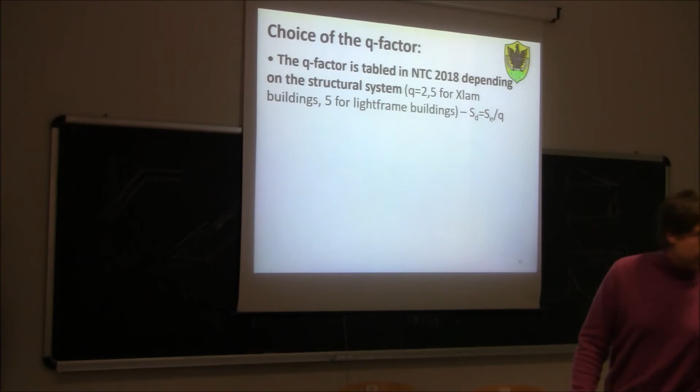Last time we discussed the choice of the behavior factor for timber structures, and we said that for cross-laminated buildings, basically, let me just show this.

This is the table we can take from our Italian regulation to choose the behavior factors. We have to distinguish between high ductility and medium ductility. For the most important systems, like light frame construction, we have a value ranging from 3 for ductility class medium to 5 for ductility class high. For cross-laminated timber buildings, our Italian regulation provides only one value, 2.5, for the ductility class medium.

We also said that, strictly speaking, if we have a type of cross-lam building characterized by short walls with vertical joints, then based on tests carried out in Japan by Italian researcher Professor Ceccotti, we can use a Q factor of 3. If instead we have walls without these vertical joints, so a panel as long as the whole wall, in this case we should use a behavior factor of 2.

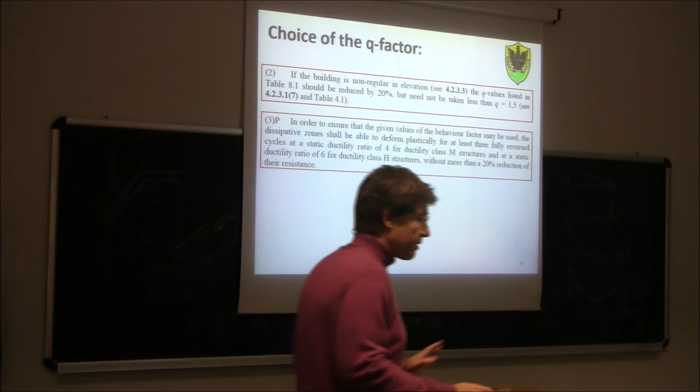So what does this paragraph mean? It means basically that first of all we should be able to identify the dissipative zones. This is the most important thing. When you are designing your reinforced concrete frame, the first important thing is to understand what are the dissipative zones. So first we have to decide or define what the dissipative zones are.

And then theoretically we should perform some tests, some cyclic tests. And a fully reversed cyclic test, what does it mean? For example, if I define...

If I have a wall, and if I define that the connection of this wall to the foundation is a dissipative connection, what I should be doing is basically apply a load, for example with a jack here. So with a jack, I should move the free end of this wall in one direction, then in the other direction. I should move it according to a certain loading protocol, which means that...

So suppose that this is U, the horizontal displacement. There is a regulation saying that when we want to test for cyclic resistance of this dissipative connection, we should move forth and back this free end from a certain quantity. For example, this is the imposed displacement by pulling and pushing the free end of this wall using a jack.

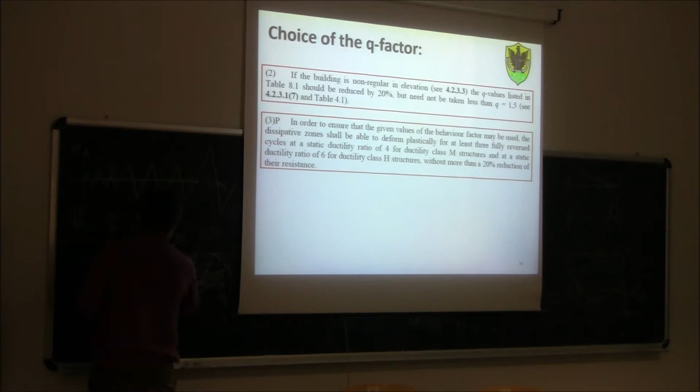And if I have a mid-ductility class, in this decrease you see there is a decrease here, delta F in some way. I get to a certain point where I have a decrease, delta F, like a kind of softening. This decrease should not be more than 20%. So delta F over F max should be less than 20%, where F max is the maximum force.

For a ductility ratio of 4 for medium ductility class, or 6 for high ductility structure.

So if this is F and U, and this dashed line is the envelope of this cyclic test, I will then have to find out an equivalent kind of elastoplastic relationship, which is actually, to be honest, not equivalent, it's more a kind of bilinear relationship, something like this. This is the conventional yielding point.

And when I get to a point where I have a decrease, so F max, this is delta F, delta F equal 20% of F max, here I identify this is U-Y, this is U-ultimate. So mu, the ductility ratio, is U-ultimate divided by U-Y. This shall be greater than or equal to 4 for ductility class M, and 6 for ductility class H.

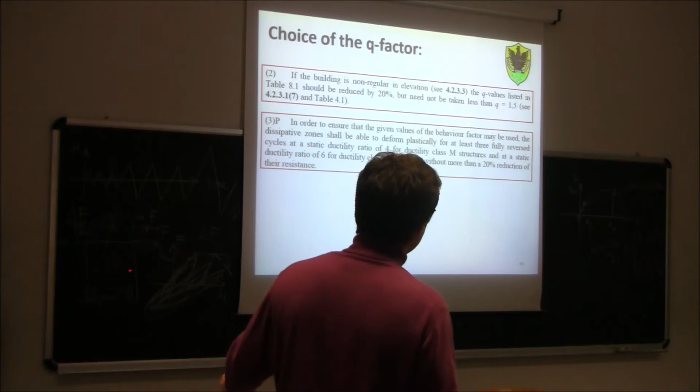Now let's try to repeat shortly again. We said that the regulation said we can use the upper limit of the behavior factor given in the table when I have performed fully reverse cyclic loading tests on the dissipative zones. These fully reverse cyclic loadings are characterized by 3 cycles in one direction, 3 in the other, with increasing amplitude, as you can see here.

Once I've done this cycle, I'm going to approximate and find what is called the first backbone curve, curva inviluppo. This first backbone curve is the envelope of the peaks of these cycles. And then I'm going to approximate this first backbone curve with a bilinear curve.

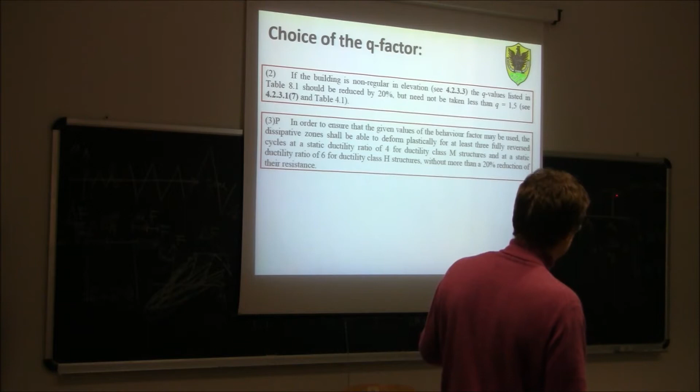So this is a bilinear curve, passing through a conventional yielding point here. On this equivalent bilinear line, I'm going to stop where I have a decrease of the peak force, F max, equal to 20%. So I'm going to define this as the ultimate point of my structure. This is the conventional yielding point, and this is the conventional collapse point.

I measure the two values of displacement, Uy and Uu. Uy is the displacement associated to the conventional yielding point, and Uu is the displacement associated with the conventional collapse point. Then I do the ratio, which will provide me what we define as the ductility ratio.

The ductility ratio shall be not less than 4 for ductility class medium, and not less than 6 for ductility class high.

So only if I comply with this relationship can I use the upper values, these values coming from this table, because those are upper values of the Q factor.

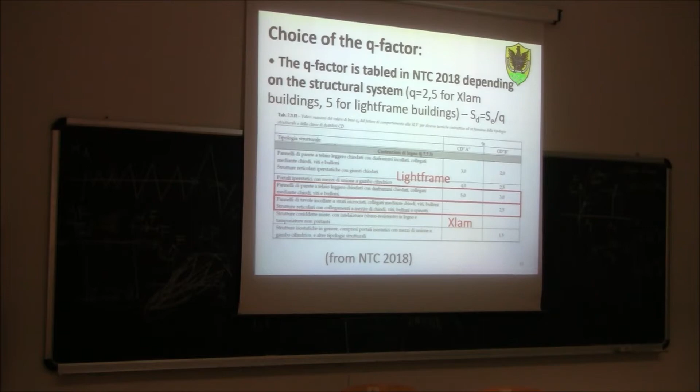Now, in order to understand how to do it—because of course when we design a structure we can't every time do experimental tests—we need to find a simplified way to solve the problem. The first important thing is to understand what are the dissipative zones for the different structural systems.

So to understand what are the dissipative zones for cross-lam, we can have a look at this video, which depicts one of the tests carried out in Japan on this 3-story cross-laminated timber building by Professor Ceccotti. This is a shaking table test.

As you can see here, the base can be moved all around with all degrees of freedom in space, with the acceleration you want. In this case, they built this building out of cross-lam, and then they subjected it to an acceleration recorded during past earthquakes.

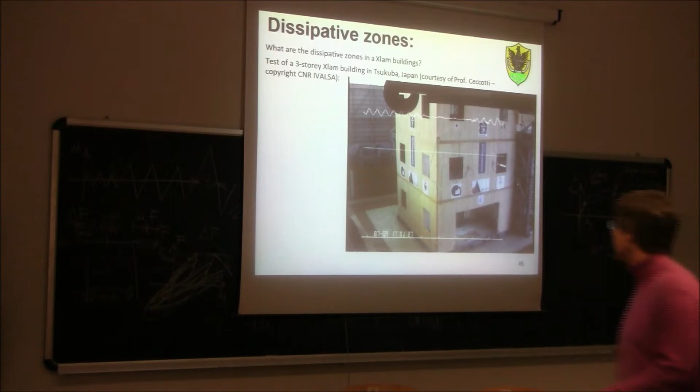Now let's have a look at the video and try to understand what kind of dissipative behavior we can see.

Okay, let's try again. Let's look at the wall. This building is made from different panels, short panels, and during the earthquake, as you can see, there is a very clear dissipative behavior.

If you want a very clear displacement, look at this wall and look how it rocks on one side and the other. So in the end, the idea is that in a building like this, the dissipative behavior is rocking.

So if this is a wall made by two panels joined along the vertical side and connected to the floor with some hold-downs and brackets, the kind of behavior that should occur during an earthquake, in order to dissipate energy, is the one you can see right now.

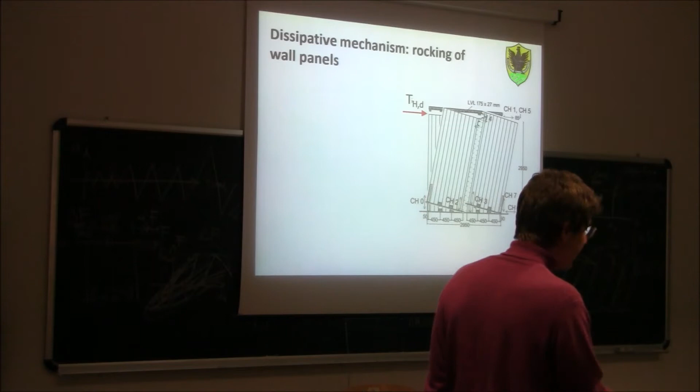Now, the hold-down is made of a piece of steel, a bolt here, the foundation, and a nail connection between the hold-down and the wall. Which one of those three connections should be able to plasticize? All three, or is it better one or the other? So there is a bolt here, then the plate, and then this nail connection between the plate and the timber.

Same problem with the plate. The plate could also plasticize in tension, but then, of course, the hold-down wouldn't be able to bring the wall back to the initial condition because it would be this kind of plasticization. Anyway, there would be a risk of brittle failure because this plate is subjected to tension.

So what should really, the only thing that should plasticize here, is the nail connection between the plate and the wall itself. This nail connection between the hold-down and the wall should be able to plasticize. And if you remember, this nail connection is characterized by a ductile failure only if the nail itself is plasticized.

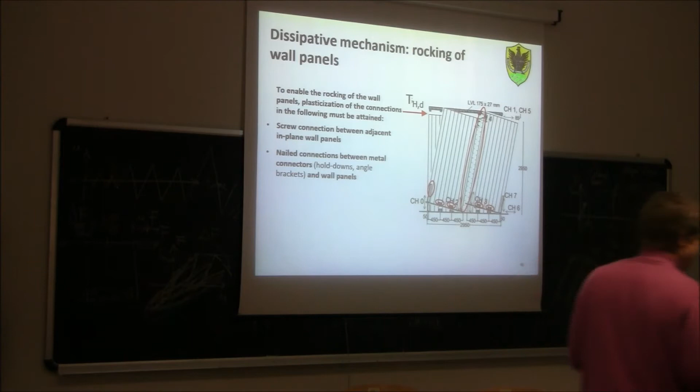We need to make sure that the failure mode of this steel-to-timber connection is characterized by the formation of 1 or 2 plastic hinges into the nails. It's not enough that this plasticizes. In order to make this happen, we need to ensure that among the different failure mechanisms for a steel-to-timber nail connection, we have one characterized by at least the formation of 1 or 2 plastic hinges into the nail.

Same thing on the angle brackets. Also, the angle brackets should be able to plasticize, because otherwise, if this connection does not plasticize, it cannot allow for this uplifting of the wall itself. So all these nail connections between steel plates and timber should be able to plasticize, plus this screw connection here between the two walls.

So again, if this is a better view of the hold-down construction, this in red, this nail steel-to-timber nail connection should be able to plasticize. This screw connection between adjacent wall panels should be able to plasticize. And this nail connection between the steel angle brackets and the wall should be able to plasticize.

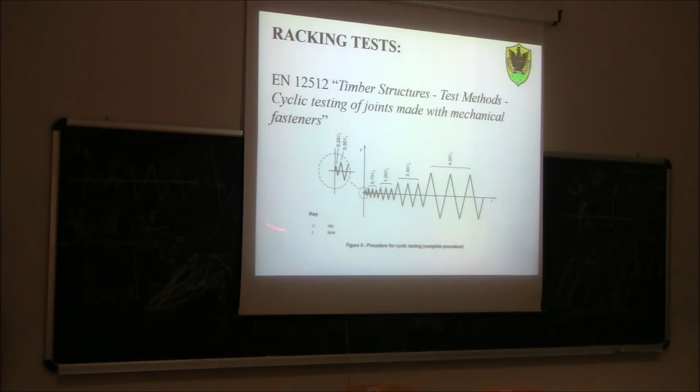Now we go back to this regulation that we were discussing before. There is a special regulation dealing with cyclic tests of dissipative connections, EN 12512, entitled Timber Structures Test Methods, Cyclic Testing of Joints Made with Mechanical Fasteners.

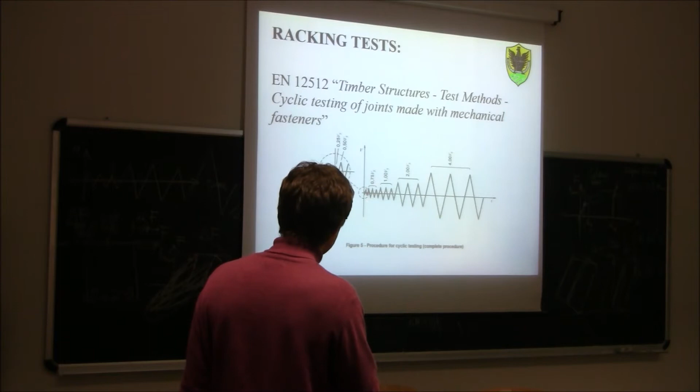Now you can see better what I was meaning before. So this is V, well V is what I call U actually, it's another symbol. The idea, as you can see here, is we have to do 3 fully reversed cycles, then increase until we get to failure. This is the procedure, a typical example. This is a test carried out on the screw connection between 2 adjacent panels.

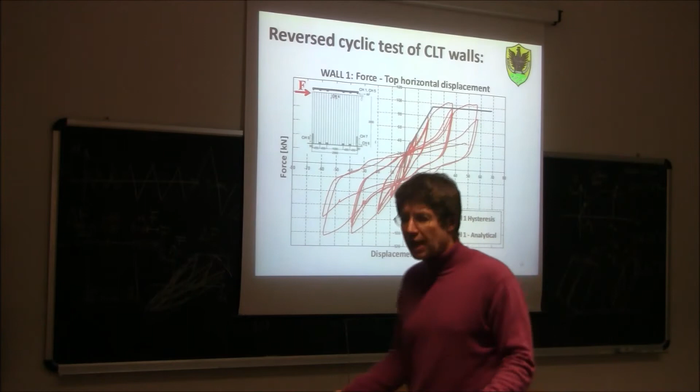So the larger the area, the greater the dissipated energy, and the greater the value of the behavior factor. So if we have a structure which is going to dissipate a lot of energy, this structure will be characterized by fat loops like this, and then we will be able to use a higher value of the behavior factor.

Instead, if we have a structure characterized by hysteretic loops like this, in this case the loops are very slim, so the area within the loops is very small, and so will be the behavior factor. So in a structure like this, the behavior factor will be very low.

Instead, if we have lots of dissipated energy like here, we can use a higher value of the behavior factor. So from our point of view, if we want to perform a better seismic design, we are looking for behavior like this, not behavior like this.

So it's interesting to notice that despite the fact that, if you remember, wood itself is not a very ductile material. If you do a test on the wood itself, like a bending test on the wood, you will get something like this. You wouldn't get any energy dissipation.

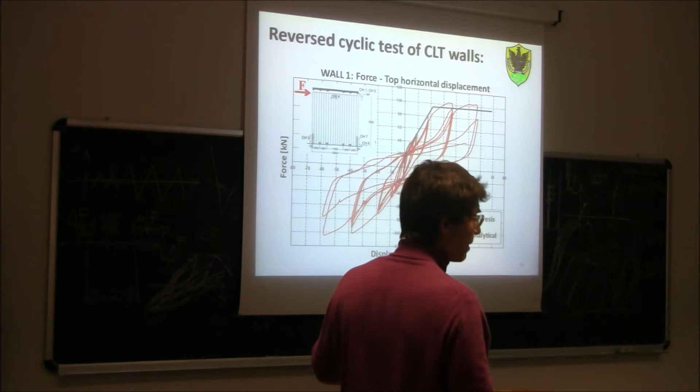If this nail connection is characterized by the formation of one or two plastic hinges, not pure embedding, then with this kind of behavior with one or more plastic hinges in the nail, you can get in the end a fairly highly dissipative structure with a fat hysteretic loop, so a significant amount of dissipated energy. Then I can use a behavior factor which is not very low. For example, for Xlam I can use a behavior factor of 2.5 or 3.

So we can conclude Xlam wall panels can dissipate energy and behave in a ductile manner if the connections plasticize. The panel itself does not contribute to the energy dissipated shown by the failure. In other words, if I do the same test on a cross-lam panel glued to the foundation, I will get something like this. So everything is related not to the cross-lam panel itself, but rather to the connection itself.

There is a significant strength degradation from the first to the second cycle, reduced strength degradation from the second to the third cycle, and remarkable strength increase after yielding. So after yielding you see a significant increase in strength. It's what we call overstrength, which we have to discuss today.

If you remember, for reticular systems you also had overstrength, but as we said last time, while for reticular systems the overstrength factor was, as some of you told me, 1.2 or 1.25, here instead the overstrength factor will be much higher, around 1.6.

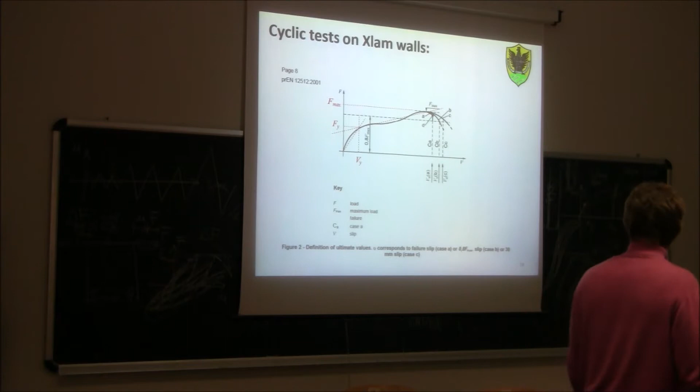So we do this pure conventional construction, get the yielding point, and then we need to define the ultimate point. How can we define the ultimate point? The ultimate point is a value that can be determined by three criteria, not just one. Before I was talking about 20% just for simplification, but actually there are three criteria for determining the actual failure point.

What could be the actual failure point? For example, you are testing the wall. At a certain point, you get a failure of the hold-down. If the hold-down fails into two pieces, you get to this point, and then the curve goes down vertically here — so you get basically a failure here. Or you can have a reduction of the backbone by 20%. Or, if the displacement becomes too big, for example 30 millimeters, then we should basically stop the test. So we have these three criteria.

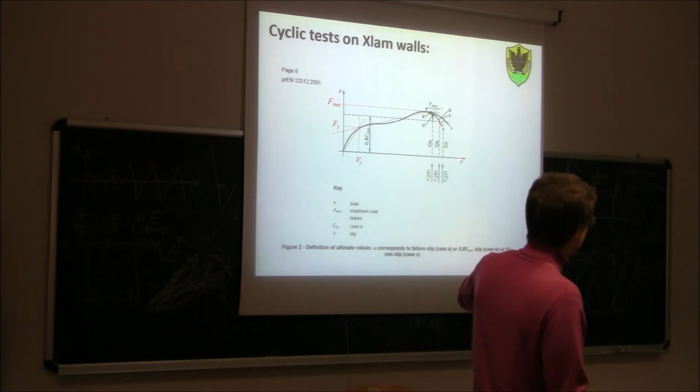The failure is defined by whichever criterion occurs first. This is just a conventional way to define the ultimate displacement. Why do we need the ultimate displacement? Why do we need the yield displacement? Because you need to be able to calculate this ductility ratio.

Remember for steel, we calculated in reinforced concrete the ductility, the curvature ductility ratio for the reinforced concrete section. So we have to calculate the curvature at ultimate and at the yielding point. In that case they were easier to assess. In this case, we need to calculate the yielding point and the ultimate point in a conventional way, and then calculate the ductility ratio between the ultimate value and the yielding displacement.

If μ is greater than 4, we have a medium ductility class, DCB, according to NTC 2018. If μ is greater than 6, we have a high ductility class, DCA, according to NTC 2018. So to understand where we are, if we have ductility class medium or high, we need to perform those tests on the dissipative connections.

For X-lam construction, we found what are the dissipative connections. Now the question is, what are the dissipative zones for light frame construction? For light frame construction, only the sheathing-to-frame nail connections on the perimeter are regarded as dissipative zones.

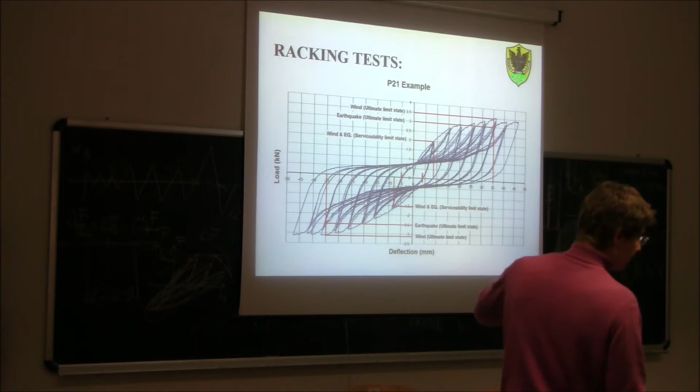Again, if we do a cyclic test on a wall like before, where we make sure that only the nail connection on the perimeter of the wall dissipates energy, we will find this kind of hysteresis loop. Those loops look, as you can see, quite fat, meaning that the structure is able to dissipate energy, and that we can use a significant value of the behavior factor.

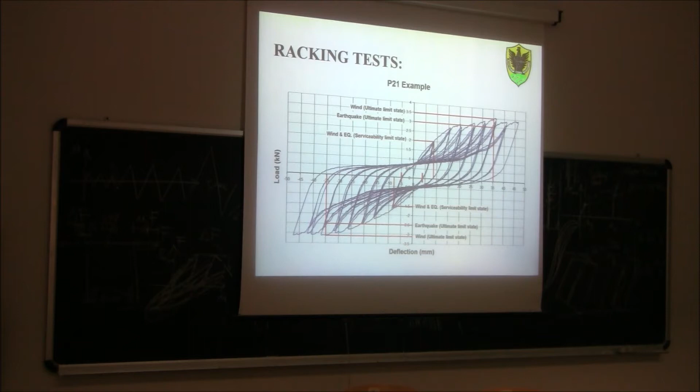Basically the idea is that we should have this kind of behavior: only the dissipative connection on the perimeter of the sheathing should plasticize. Everything else should remain elastic. If this is the case, we can get a good dissipative behavior.

According to Eurocode 8 and the Italian regulation, a Q factor of 5 may be assumed. Note that some other regulations, like the New Zealand standard, and also the new Eurocode 8 that will be issued later, will reduce this value from 5 to 4, because 5 was found to be a bit too high. For the time being you can use 5, but be aware this will be reduced to 4. In my opinion, since 5 is the upper limit, the maximum, it wouldn't be a bad idea to design the structure using 4 instead of 5.

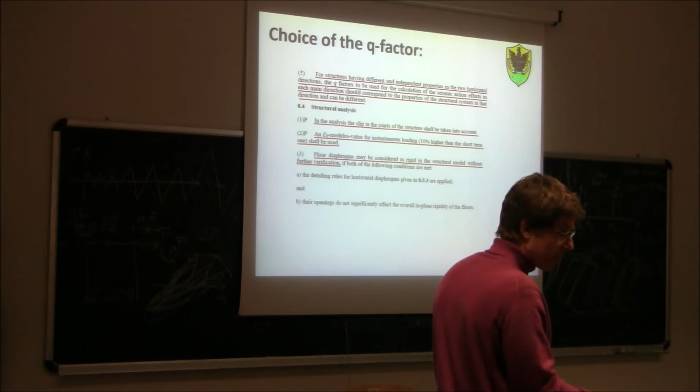If your structure is regular in elevation, you can use equivalent static analysis. If it's not regular in elevation, you use dynamic analysis. In this course we are just going to use equivalent static analysis, the one that you saw with Dr. Somenta and also with Professor Vitali. So we will assume that our building is regular.

Your building may be made of different lateral load resisting systems in the two directions, like in the case of reinforced concrete, where you could have walls in one direction and frames in the other. If the building is regular, you can reduce your seismic analysis to two plane analyses, one in each direction, using different factors. You don't need to use spatial analysis. Same thing we will do in this course, assuming the behavior factor is the same in both directions, or anywhere we could consider it as a plane structure in terms of multi-story building.

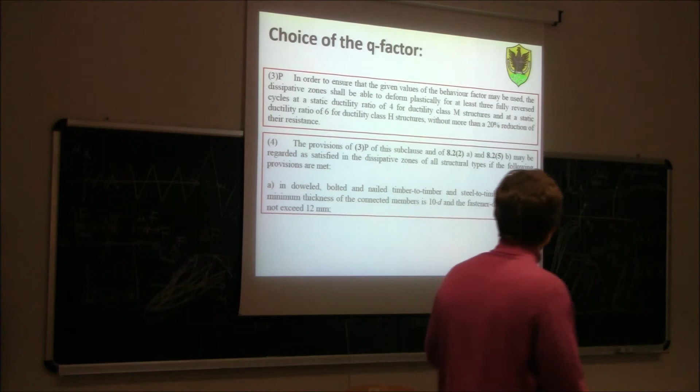So now, if you remember, we said we have a table with the values of the behavior factors. Those behavior factors are the upper limit. If we want to use the upper limit for a high ductility structure, we need to make sure that the ductility of the structure is at least 6.

If we want to use the upper limit of the behaviour factor for a medium ductile structure, we need to make sure that the ductility factor is at least 4. The problem is that when we design, we cannot check the ductility of 4 or 6 by doing tests. So the regulation provides some clauses that are simpler to apply at the design stage.

The regulation says these provisions may be regarded as satisfying the dissipative zone or structure type if the following provisions are met: in doweled, bolted and nailed timber-to-timber and steel-to-timber joints, the minimum thickness of the connected member is 10D, and the fastener diameter D does not exceed 12 mm.

What does it mean? If our dissipative zone is made in this way, with a doweled connection between two timber members and another timber member, and we define T as the thickness of the minimum timber member and D as the diameter of the fastener, then in order to use the higher value of the behavior factor, we need T, the minimum thickness of the timber member, to be greater than or equal to 10 times the diameter of the fastener, and the diameter of the fastener must not exceed 12 mm.

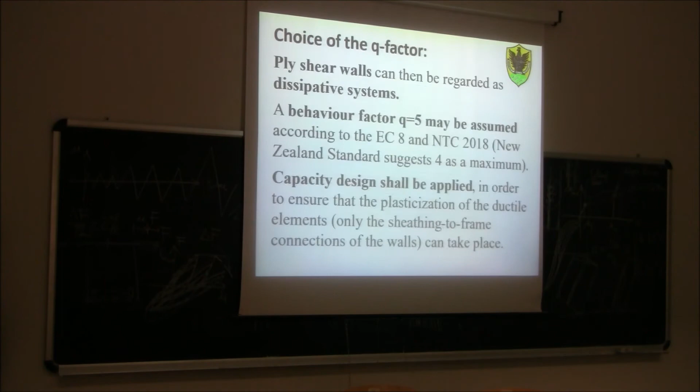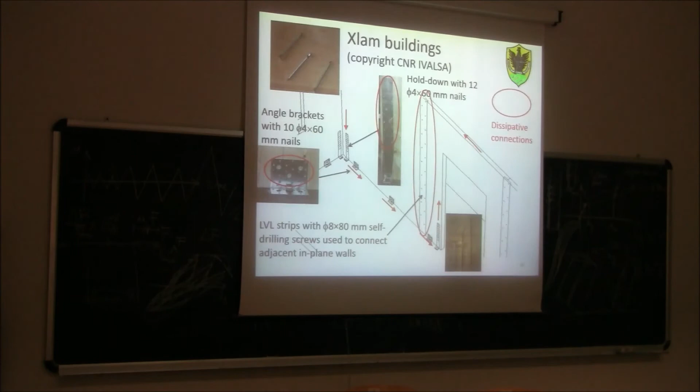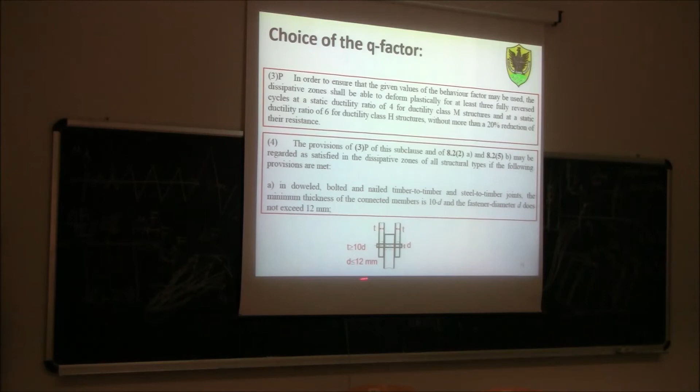Okay, so if these conditions are satisfied, then we can use the behavior factor Q of 4. If these blue conditions are satisfied, if you compare the blue with the red, you will see that D is always less than 12 mm, but this time T is greater than 8D, not 10D, then a Q factor of 2.5 can be used.

So in the end, when it comes to design, for example, a moment-resisting frame or light frame construction, you can check if you can comply with either of those conditions we saw before. If the blue is satisfied, you will use a behavior factor of 4. If the red is satisfied, you will use a behavior factor of 5 for the light frame construction.

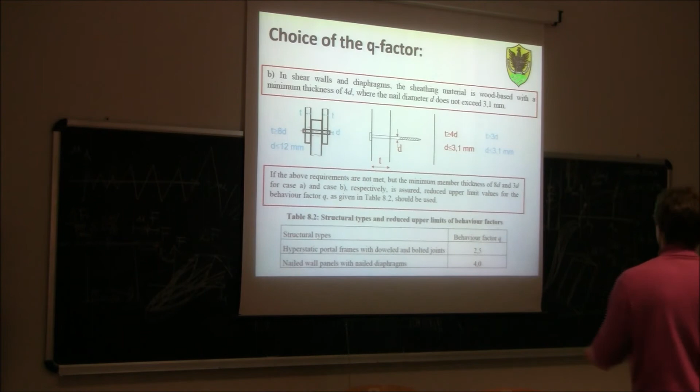Now the question is, why do we need to check those ratios? Why, if for example T is greater than 4D and D is less than 3.1 millimeters, can we use a Q factor of 5? Otherwise, you only get a factor of 4. Because basically, those relationships are related to the type of failure mechanism.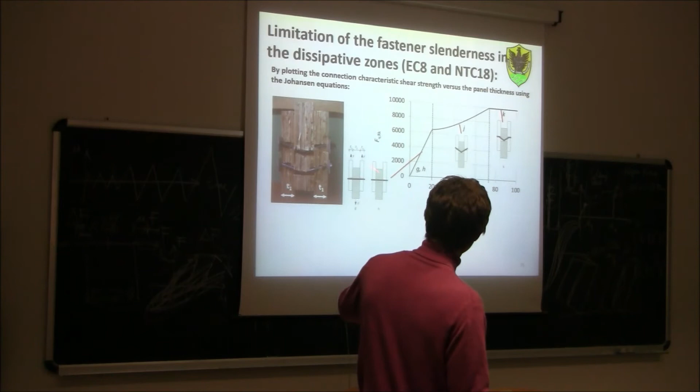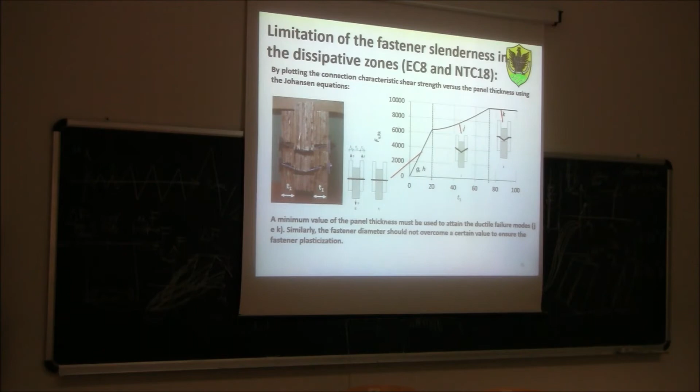So this is why there is this limit of T1. T1 over D must be greater than this value that we found before. So in the end, this relationship here.

This one, T greater than 4D or T greater than 3D or T greater than 8D, comes from the fact that only by imposing those limits can we make sure there will be some standard, because T greater than 8D means the fastener becomes very slender. The more slender the fastener, the easier is the plasticization of the fastener, because it becomes more slender.

Another possibility, given by the new technical regulation, the Italian technical regulation, that will also in the future be approved in Eurocode 8, is basically to ensure in the equation that the failure mechanism is characterized by one or two plastic hinges in the fastener.

In other words, without any limitation of the diameter or the thickness of the timber member, if we have, for example, a timber-to-timber connection, we may have 6 failure mechanisms. The idea is that if we have a dissipative connection, we should not allow any failure characterized by no plastic hinge formation in the fastener.

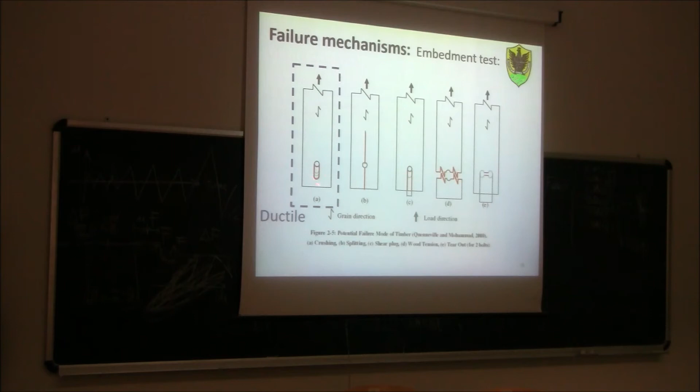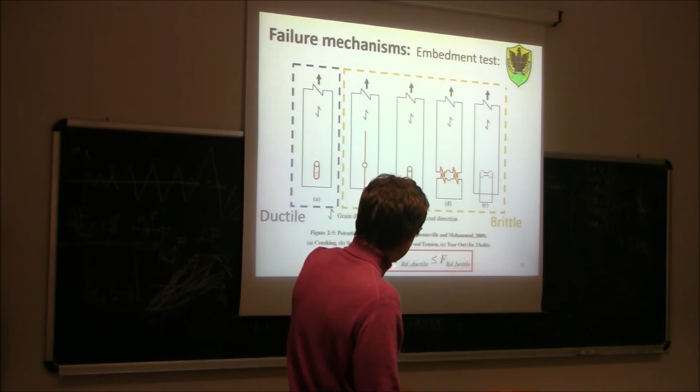So all the brittle modes should be characterized by a strength greater than the strength of the ductile failure mode times the overstrength factor. In this case, since failure modes like splitting, tear-out and shear plug are very brittle, we have to use an overstrength factor of 1.6, not 1.2.

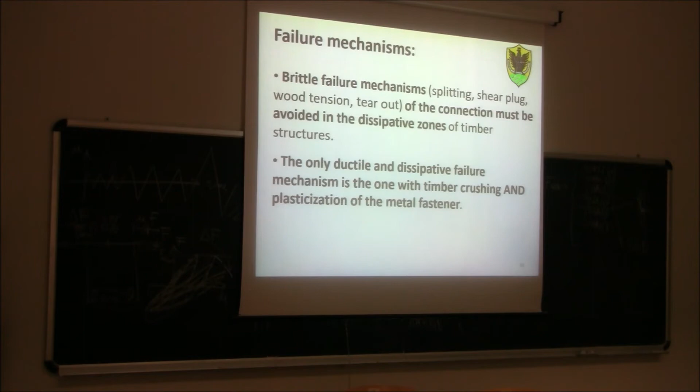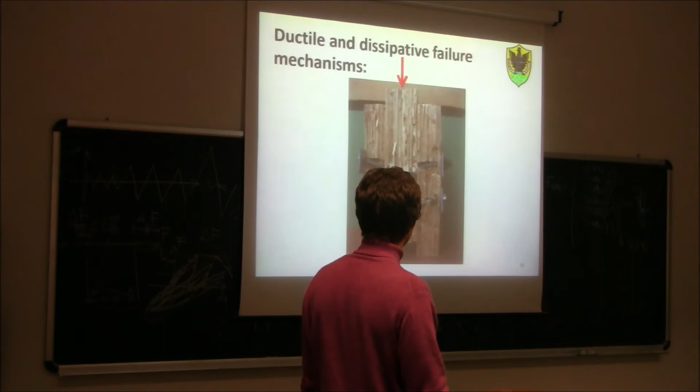And if you are in the dissipative zone, crushing alone is not enough; we need at least one plastic hinge formation in the fastener together with crushing failure of timber parallel to the grain at the interface with the steel fastener. Why is that?

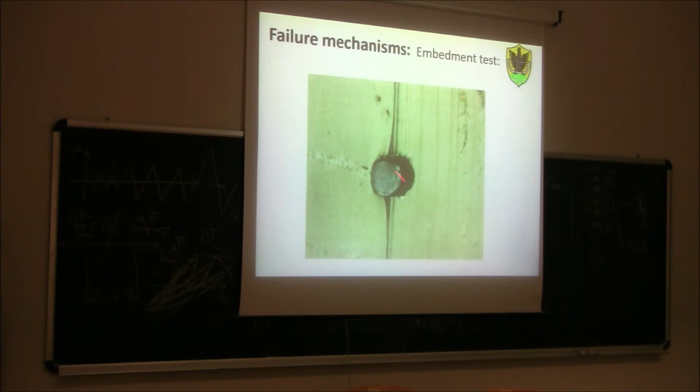As we push the fastener into the wood, we get plasticization of the wood, so we get something like this. You see here, this is the hole, this is the dowel. The dowel is pushed against the wood, so here we have plasticization, and here we have a gap now. So when we push in this direction, we have stiffness because there's contact. When we unload and apply the reverse load, before the dowel touches the other face, there are some displacements where the dowel sits between the holes, not in contact with the wood anymore. So we are in this zone here.

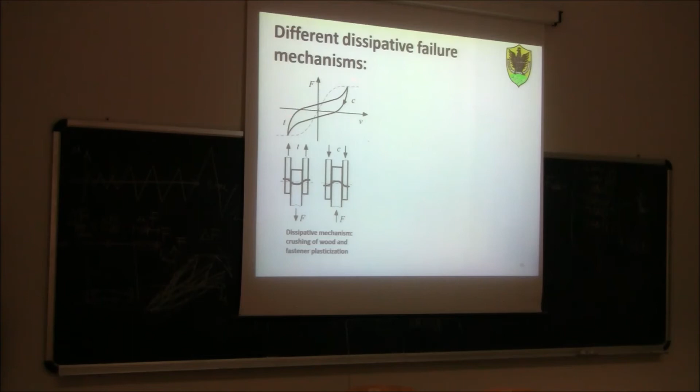between the dowel and the wood, due to the timber plasticization around the hole. If we have a plastic hinge formation like here, we have 3 plastic hinge formations, and as you can see, we have lots of energy dissipation.

If we oversize the dowel, so we don't allow the steel to plasticize, then as you can see we have much less energy dissipation. The hysteresis loops are much tighter, meaning less energy dissipation and a lower value of the behavior factor.

Of course, ideally, if we can exploit all the plasticization of the steel, for example by building this kind of dog-bone steel plate, which is then welded to two other steel plates nailed to the timber, in this case all the plasticization happens in the steel of this dog-bone. In this case we can maximize the energy dissipation.

So in this case we have a very fat hysteresis loop characterized by lots of energy dissipation. What we would be doing here is design this nail steel-to-timber connection for overstrength relative to the steel. We make this connection very rigid to make sure there is no plasticization in the nails, and all the plasticization is inside this dog-bone steel plate.

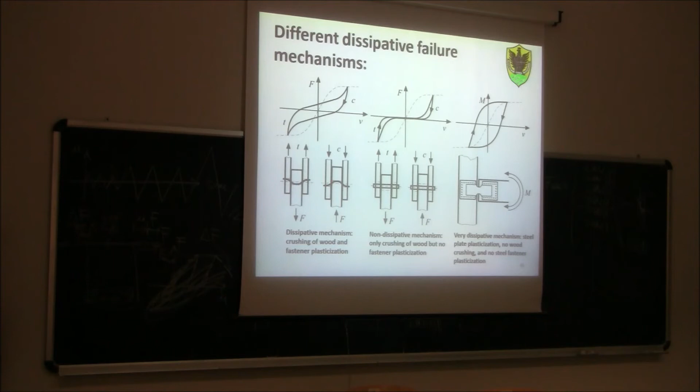But usually the situation we have in a normal timber structure is this one. So we design dissipative connections by making sure that the steel fastener is plasticized, and then we have a significant amount of energy dissipation in the joint. Perhaps not as much as here, but still enough to get some higher value of the behavior factor.

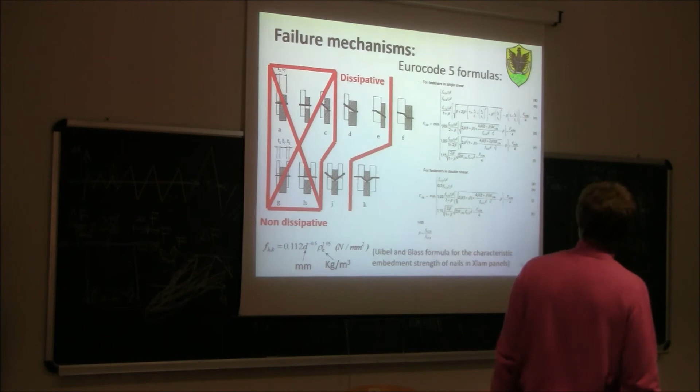Just a reminder that with the Eurocode formula we can calculate the dissipative mechanism. If we are in a dissipative connection, we should avoid non-dissipative mechanisms characterized by no plastic hinge formation. Instead we should impose that we have at least one plastic hinge formation for dissipative connections, or more than one plastic hinge formation for very dissipative connections.

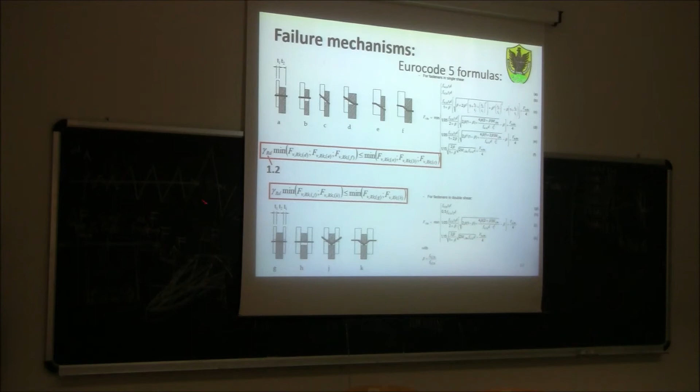Just remember to use this factor of 1.2 between the failure mode characterized by plastic hinge formation and the failure mode characterized only by crushing, only by embedding. Of course this coefficient is the same for all the different kinds of connections.

Also in this case, if we have a steel-to-timber nail connection, we want to ensure at least one plastic hinge formation, so failure mode B, or if we have a thick steel plate, one or two plastic hinges in the nail.

Otherwise, if we don't have B, D, or E, we can have a different kind of failure mechanism that is brittle. So in all these failure mechanisms, always remember to use this 1.2 factor between the brittle and the ductile failure mechanisms.

Another important point from the regulations: what safety coefficient, partial safety factor, to use in design verification. The regulation states that for ultimate state verification of structures designed according to the concept of non-dissipative structural behavior, so ductility class L, like in the case of your design for a single-story industrial building, the partial factors for material properties gamma M for fundamental load combination apply. So in your case you should use the gamma M factors from NTC 2018 for fundamental combination, which are 1.5 for solid timber and 1.45 for glulam timber. Suppose you are using glulam timber for your building, so 1.45.

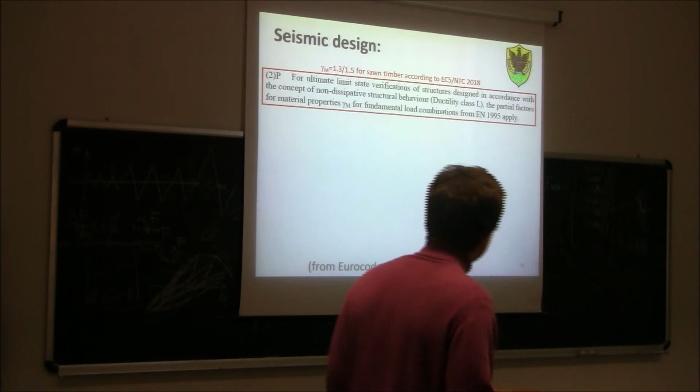For ultimate state verification of structures designed according to the concept of dissipative structural behavior, so ductility class M or H, the partial factor for material properties for accidental load combination applies. Now, if you look at the Eurocode, for the partial factor for accidental load combination, gamma M is equal to 1. However, if you look at NTC 2018, our Italian regulation, it states that you can use 1 only if you take into account the reduced strength, the strength degradation, in the connection.

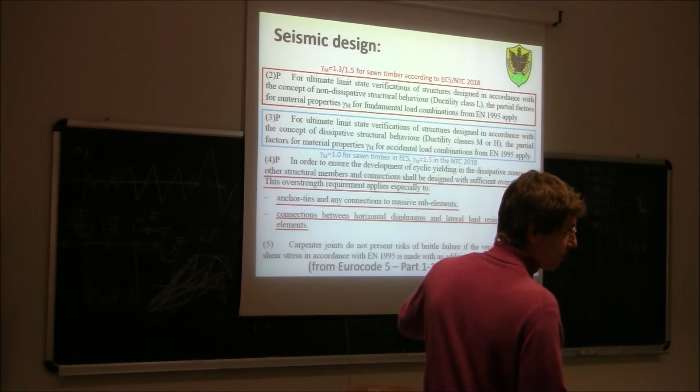Since in general we don't do so, because we calculate the strength of a connection, for example, using the Johansen equations, and those equations do not consider any strength degradation, according to our technical regulation for construction we should use 1.5. So in the end, in Italy at the moment, we should use 1.5 for both non-dissipative and dissipative design.

The Eurocode states that in order to ensure the development of cyclic yielding in dissipative zones, all other structural member connections shall be designed with sufficient overstrength. So this concept of overstrength is mentioned.

Particularly, any connection to massive sub-elements, for example the hold-down, can be considered as non-dissipative, and these must be overstrong. Also connections to horizontal diaphragms and lateral load resisting vertical elements.

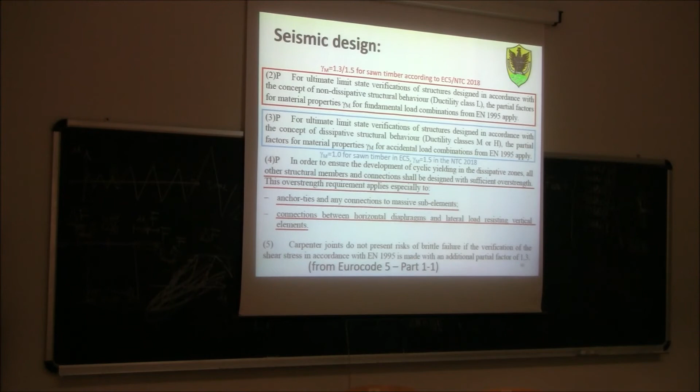Now we need to understand, and here we need to be careful, so please try to follow what I'm saying. If you don't understand, ask again, because this is tricky: the concept of capacity-based design in general, and particularly capacity-based design for timber structures. So far we have learned capacity-based design only from the reinforced concrete design course, where it was designed quite properly. But we need to understand better the application of capacity-based design to a timber structure.

Suppose you have to design this dissipative connection between this column and this beam, in a moment-resisting frame like the one you are designing in your course. However, in your case, for simplicity, you consider it as non-dissipative. Now suppose we want to consider this design as dissipative. How should we design this connection between the timber beam and the timber column?

Well, we should first calculate what we call the seismic demand. The seismic demand will be a bending moment here, a bending moment for the beam and a torque moment for the connection. This torque moment for the connection, seismic demand, E_Ed, should be calculated by analyzing the frame under equivalent seismic forces calculated using the design spectrum—exactly like you did for your moment-resisting frame made of reinforced concrete two years ago.

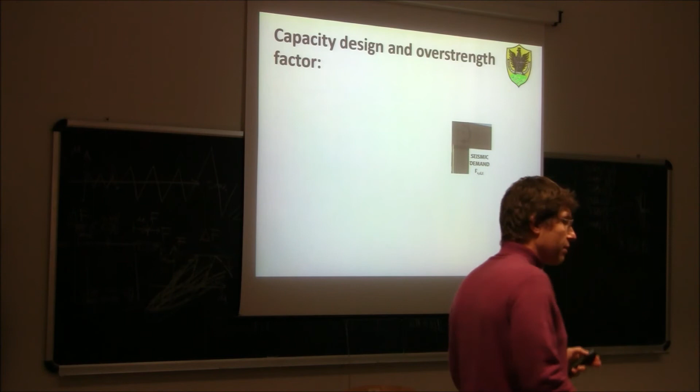So you calculate, in that case, the bending moment of the beam by analyzing the frame under a system of equivalent lateral forces calculated using the design spectrum. The design spectrum is taken from the elastic spectrum divided by the Q factor. In your case it was 5. In this case, for a joint like this, it could be 4.

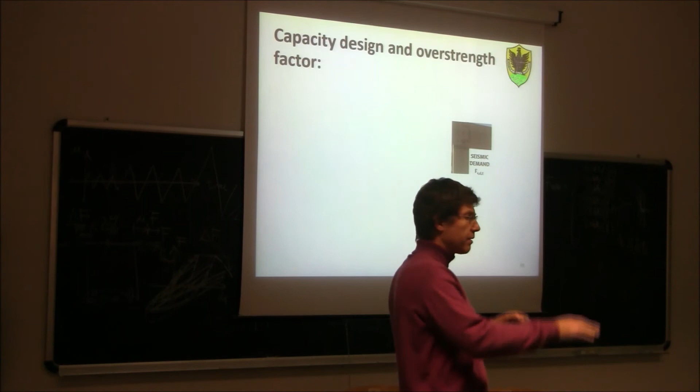Is it clear? So when we have to design this beam-column joint, we need to calculate the demand F_vdE by solving the frame under a system of equivalent seismic forces calculated from the design spectrum. The design spectrum is the elastic spectrum divided by the Q factor—in this case Q equals 4. So we do this analysis and calculate the seismic demand F_vdE.

We need to compare the seismic demand with the capacity of the joint, assuming this is the dissipative joint. The capacity of the joint can be indicated by F_Rdd—this is the bending capacity, or torsional moment capacity, of a dissipative joint.

Now, if this is our frame, we know the joint is the only dissipative component of the frame, while the timber column and the timber beam are the brittle components. Of course, this is different from what you learned for reinforced concrete, because there, what would have been the dissipative component? Which component was the dissipative one?

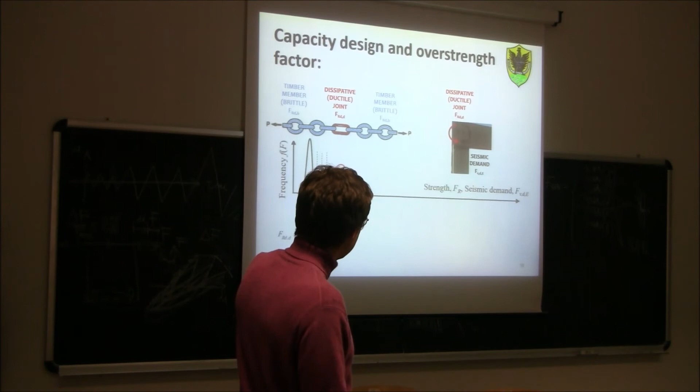So our design equality in the joint, the dissipative component, will be that FRDD, the design strength capacity of the joint, which is the characteristic strength capacity times K mod divided by gamma m, shall be greater than the seismic design FVDE. Where FVDE has been calculated from the design spectrum, which is the elastic spectrum divided by the Q factor, where Q factor is equal to 4.

So it's clear until here, the design of the dissipative component. Until here there shouldn't be any important news with respect to what we do. Now the news comes from how we design the brittle component, the brittle member.

So how do we design the timber beam and the timber column? Both of them, you see, are brittle components. What does it mean that they're a brittle component? It means that if they break, all the structure will break, and there will be no possibility for this joint to dissipate energy.

Just a reminder that the only reason why we are able to reduce the elastic spectrum by the Q factor is just that we make an assumption that this joint is going to dissipate energy. This joint should have, if we have a moment over rotation curve for this joint, this should be something like this, characterized by a significant energy dissipation.

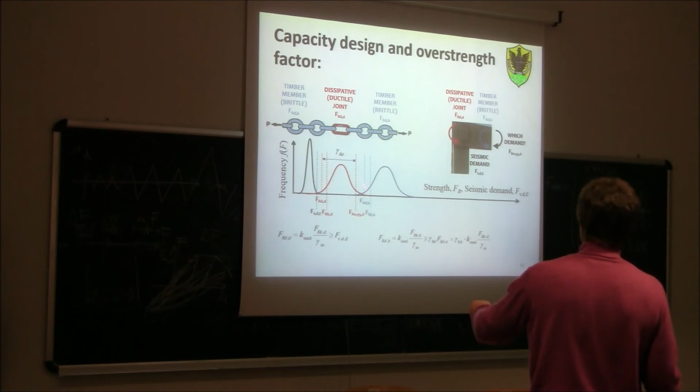And then the blue curve could replace the red one, because the red one would deform into a vertical line. In other words, the overstrength factor mostly takes into account the scatter of values of the strength value of the connection.

So in the end, capacity-based design will be applied exactly like for reinforced concrete. In this case, gamma D is mostly the scatter of values of the strength of the dissipative component. In the end, gamma D is in some way the ratio between the upper fifth percentile and the lower fifth percentile of the strength of the connection.

Now, is it clear why we want to design for this value here rather than the other one? Do you have a question about this? This is a fairly complex concept, which is actually the same for all materials.

The only important difference is that for timber this curve is quite flat, so we have an important scatter of experimental values, whereas for steel this curve would be much narrower.

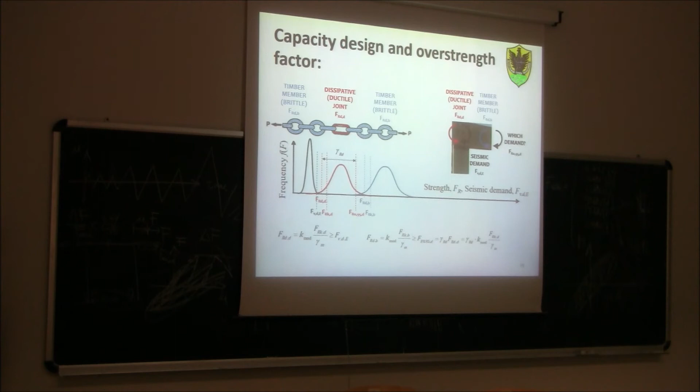So this is basically what we said before, is the summary. The dissipative zones, which are selected timber connections in timber structure, are designed for the reduced seismic actions calculated considering the behavior factor Q, assuming gamma m equal to 1 according to Eurocode, or gamma m greater than 1 for fundamental combination according to NTC 2018.

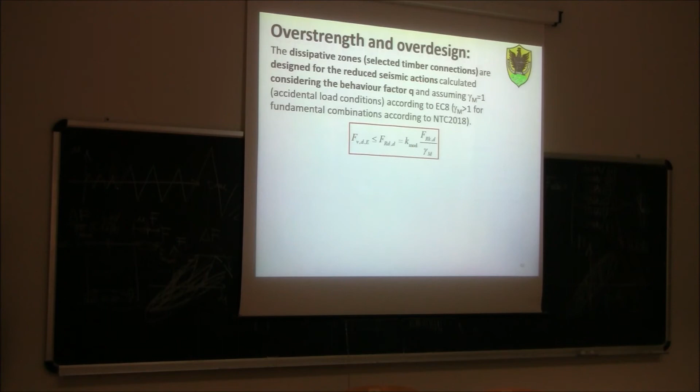So this means that when we design cross-laminated structures, we design for the reduced seismic actions only. You remember what, the cross-laminated building. Which connection are we going to design for the reduced seismic spectrum?

Yes, I'm just asking for a cross-laminated structure. When you design the cross-laminated structure in earthquake-prone area, which connections will be designed for the reduced design spectrum, basically, so for the reduced elastic spectrum, which is elastic spectrum divided by 1 by Q factor.

Only some connections, we said, not all the members. Remember which connections in a cross-laminated panel, in a cross-laminated structure? We said the nail or screw connection between adjacent panels, in order to allow this kind of behavior, so this vertical here, and the connection between the hold-downs and the timber, and the connection between angle brackets and the timber. Okay, only this will be designed for this reduced factor.

In a light-frame structure, only the nail connection between the sheathing and the frame. Okay? Everything else will be designed using capacity-based design, so it will be designed with this criteria that we saw before.

So meaning that, you see, we need to multiply. We need to start from the actual design strength of the dissipative connection, like it was the bending strength of your frame, if you remember. We need to multiply this by the overstrength factor, and then from the equilibrium we need to find out the other values acting on your members.

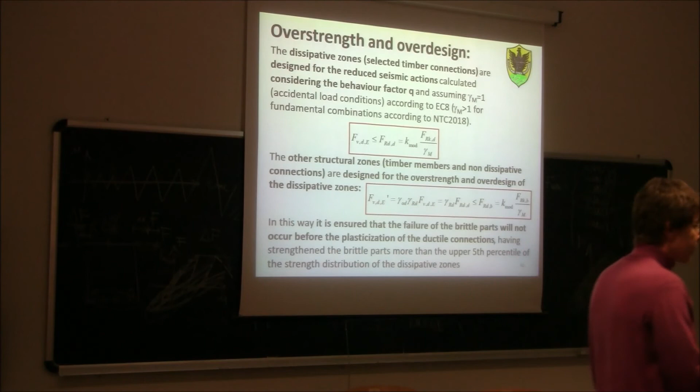So in this case, it is ensured that the failure of the brittle parts will not occur before the yielding of the ductile connections. Because what we have done this way, we have strengthened the brittle connection. We have oversized it in such a way that the probability that these brittle members can fail is only 5%, because we have designed for the upper 5th percentile.

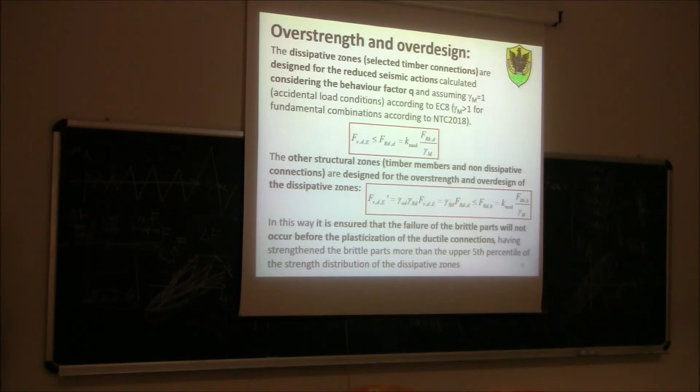So now if you look at the overstrength ratio, we said before that the most important component of the overstrength ratio is the scatter of the results. In reality, it's not only the scatter.

Now suppose that you do a test like this. So you have a timber connection, you apply a load, and you go up to the failure of the member. In the end, you get a curve like this. If you repeat the test with more specimens, you get a certain scatter of results, as you can see here. So we would have, for example, 5 different curves with different values of results. And of course, if you have a number of results, you can always calculate the mean value. You can always calculate the upper 95th percentile and lower 5th percentile, okay, of this connection here.

Now, if this is the dissipative connection in our structure, we can say that the demand due to the seismic action, so the seismic design, shall be less than or equal to, in general, the analytical design value of the connection itself. So, FD is the strength demand calculated using the reduced elastic spectrum, the reduced design spectrum, which is the elastic spectrum divided by the factor. And then we will have a design strength.

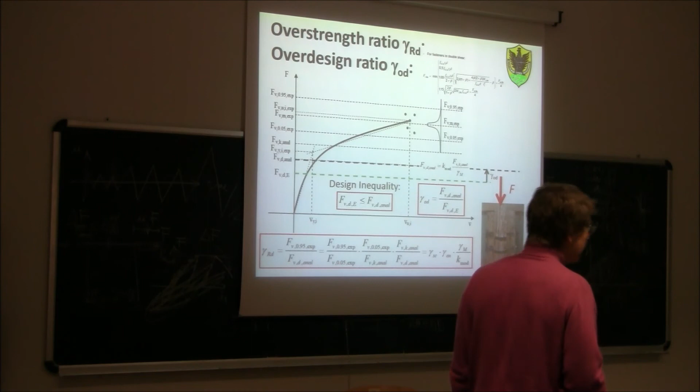We calculate the overstrength factor as the ratio between the design value of the analytical strength and the upper 5th percentile, or lower 95th percentile, experimental value. So the overstrength factor gamma Rd is FV0.95 experimental divided by FVD analytical.

FVD analytical for a connection like this would basically be the formula from Eurocode 5, saying the capacity is Kmod times the characteristic analytical value of the shear strength divided by gamma M, the partial factor.

This ratio can also be expressed as the product of three different ratios: FVK analytical divided by FVD analytical, times FV0.05 experimental divided by FVK analytical, times FV0.95 experimental divided by FV0.05 experimental.

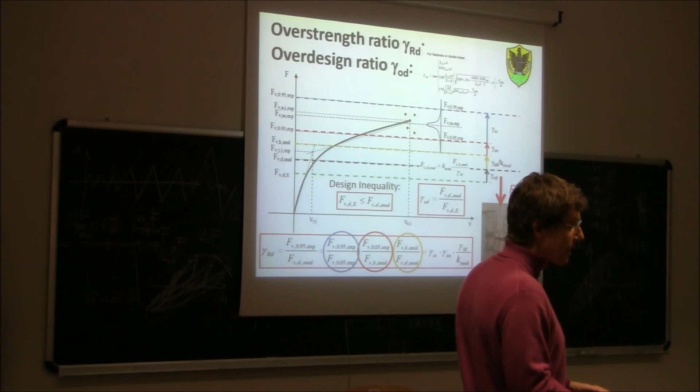We have to use the overstrength factor the same way as when we design a moment resisting frame in reinforced concrete. Just remember that here the dissipative element is the connection, not the beam, while for reinforced concrete it was the beam, not the connection.

Now, which value to use for the overstrength ratio? If you look at Eurocode 8, in the current version there is no indication about the value for the overstrength.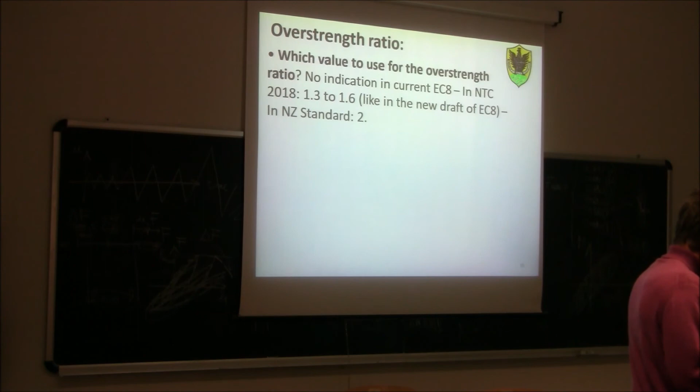If you look into the Italian regulation, it's from 1.3 to 1.6, like in the new draft of Eurocode 8. The New Zealand standard is 2. So as you can see, the value is significantly higher than the value used for your design, because for reinforced concrete it was 1.5, for steel even less. Here it's either 1.3 or 1.6.

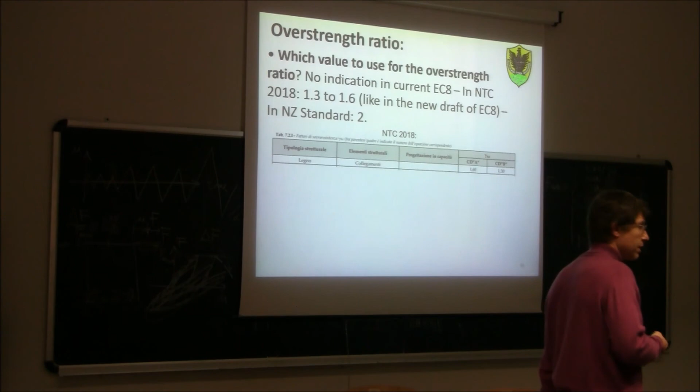You can see here, Italian regulation overstrength factors for ductility class A, which means highly dissipative structure, 1.6. For ductility class B, which is medium dissipative structure, 1.3. Similar values appear in the new Eurocode 8 draft, still under discussion: 1.3 to 1.6.

These values come from results of several experimental cyclic tests performed in different research institutes in Europe and around the world. You can see here several cyclic tests under brackets, in the axial direction, in the shear direction, and so on. So several tests, and in the end those were the values that were found.

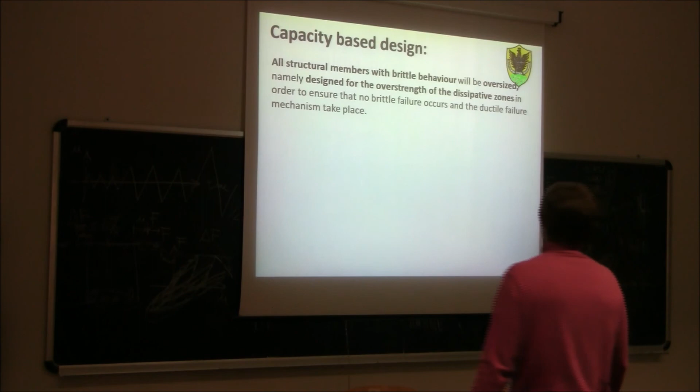So, in the end, when we do our seismic design, we proceed in this way. First we see, depending on the structural system, from the table of the behavior factor, which value of the behavior factor we can assume. If our structure is medium or high ductility, we get the value of the behavior factor.

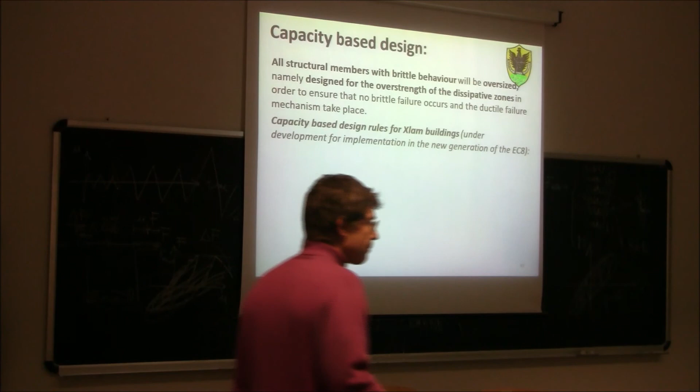Then we consider the design spectrum, which is obtained by the elastic spectrum divided by the Q factor. With this value of seismic action, we design the dissipative elements. Once we have designed the dissipative element, we use capacity-based design to design all the brittle elements.

Now, what are the dissipative elements and brittle elements, for example, for cross-laminated timber buildings? We already said before, but now we can summarize better. Capacity-based design rules for cross-laminated timber buildings, which are under development in the new generation of Eurocode 8, state that timber buildings shall act to the greatest possible extent as box-type structures.

We will study next year, in the course of masonry construction, that in order to get very good behavior from a masonry structure, the only way is to make sure it behaves as a box-type structure. What does box-type structure mean? If you have, for example, a box where you put your shoes, if you have a box without the lid, the resistance is much lower than if you have a box with the lid. Completely different.

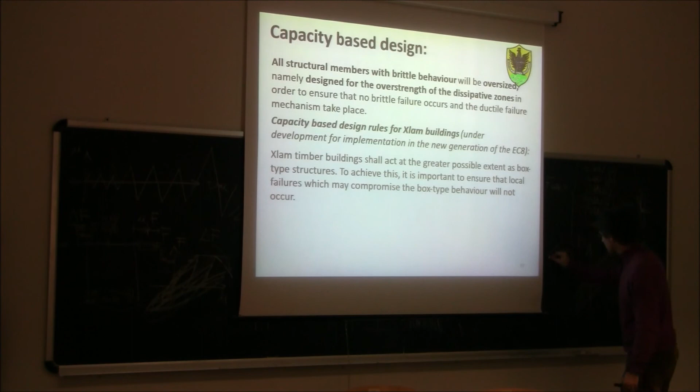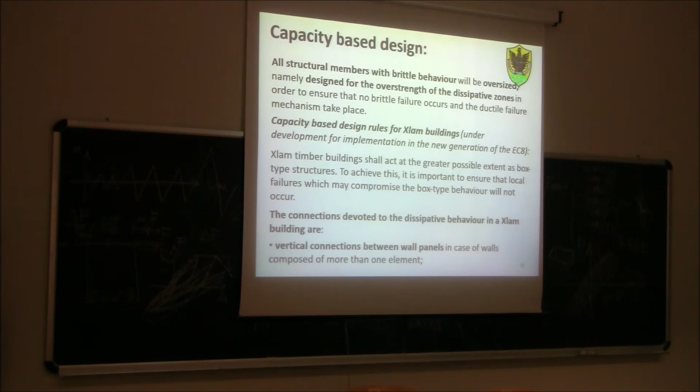So a box without a lid is much weaker compared to a box with a lid above. The idea is that both light frame structures and cross-laminated timber structures should behave, to the greatest possible extent, as a box-type structure. So in cross-laminated timber buildings, what are the dissipative connections?

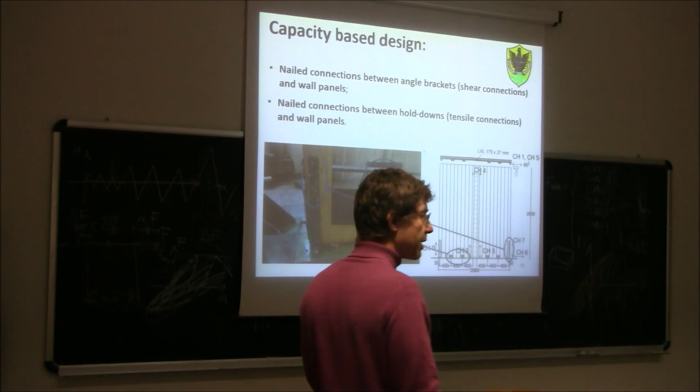Also you see this kind of joint here, screw joints. Also the nail connection between the angle brackets and the wall panels will be dissipative joints. And also the nail connection between the hold-downs and the panels. So those three kinds of connections are the dissipative connections in cross-laminated timber buildings.

And they will all be designed for the reduced elastic spectrum, so for the elastic spectrum divided by the Q factor, which according to the Italian regulation is equal to 2.5.

In order to ensure the development of cyclic yielding in these dissipative zones, everything else shall be capacity designed. What does that mean? That all the other members will not be designed for the same seismic forces obtained from the design spectrum, but will be designed for the overstrength of these dissipative joints using equilibrium.

So some of the connections will be designed for the overstrength of the dissipative zone, where 1.3 is the overstrength factor according to Italian regulation. For example, you see here the screwed connection between adjacent floor panels; this screwed connection will be designed for the overstrength of the other connection.

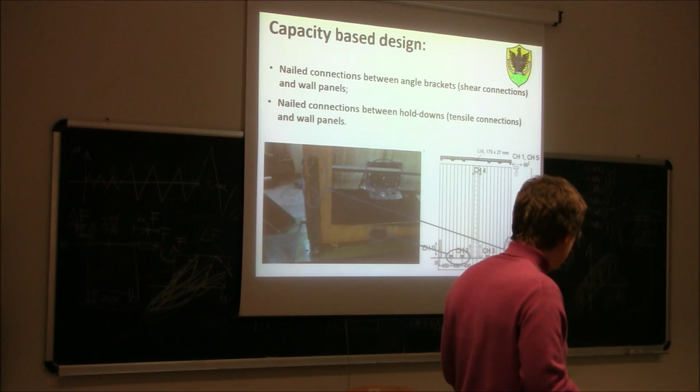So the fastener shall be perpendicular to the shear plane. The same thing also in this connection between the angle brackets and between the hold downs and the walls. So all those connections shall be made by fastener with a direction perpendicular to the shear plane. And since those are dissipative connections, we will have to make sure that the failure modes of those screws or joints are characterized by at least one plastic hinge formation. Okay, is it clear what I'm talking about?

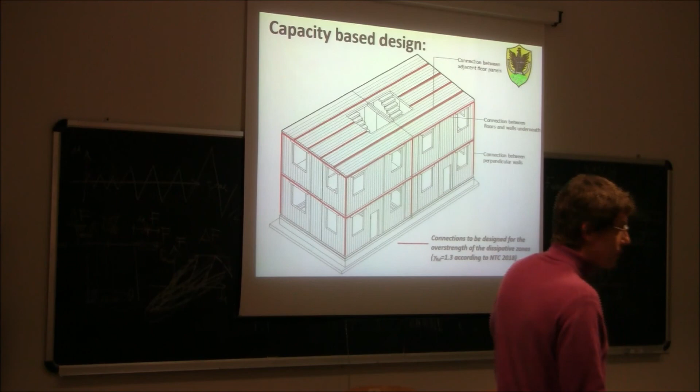Instead, this other connection you can see here, the connection that is to be designed for the overstrength of the other - for this connection we are not interested in ductile behavior, because those are connections that may also be hard to break. So for this connection, the best way is to use inclined screws, so not perpendicular to the shear plane, but inclined, 45 degrees. Because when we incline the screws, if you remember, we increase both the strength and the stiffness.

However, we cannot use inclined screws in the dissipative regions. Because in the dissipative regions, if you remember, the inclined screws are very strong and stiff, but not ductile.

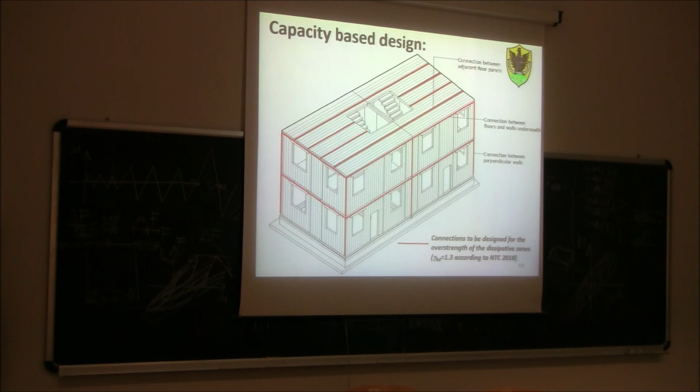In addition, we said all these connections will have to be oversized - we're using capacity-based design, so designed for the overstrength of the dissipative joints. And also some other members, for example, the panel itself behaves brittle, so also the panel will have to be designed for the overstrength of the dissipative connections, and also the floor panels, and also the metal part of the hold downs.

So this is a photo showing a kind of wrong failure mechanism. This is actually a real hold down that was tested by a former PhD student of mine, and he found out that this hold down broke in this way. Now this is a clearly wrong failure mechanism. Why is it a clearly wrong failure mechanism? Because we said before that the hold down shall be designed in such a way that this nail connection can plasticize, because all the energy dissipation comes from the failure of this nail connection between the hold downs and the timber itself. If there is a failure like this, it's clear that this connection cannot dissipate energy. It's clear that the system becomes unstable, and it's clear that we cannot design a system that breaks in this way for a Q factor of 2.5.

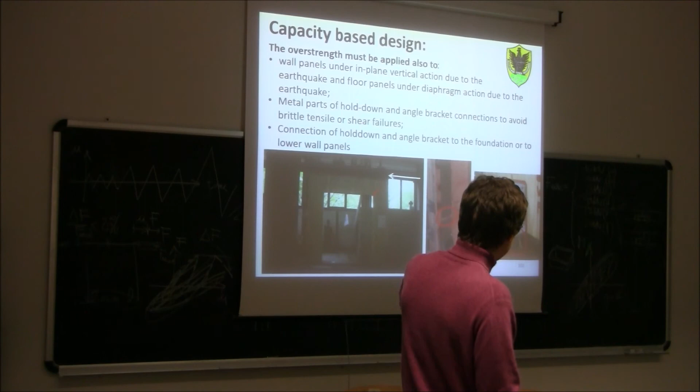Also, this screw connection of the angle brackets to the floor should not break this way. The strength of this part should be much larger than the strength of this part here, which is the ductile part. So this was not designed properly. All of those figures and photos show failure modes which are wrong.

Why are those failure modes wrong? With D, you can see the ductile part of the hold down and the angle bracket. So D is the ductile part, what we should be designing as a ductile connection. While instead, B is the brittle part. The brittle part can be the connection or can be the metal itself. Now, how do we ensure the brittle failure mechanism B of hold downs and angle brackets won't occur? How can we make sure that the hold down is well designed, so that the brittle part won't fail before the ductile part?

We need to use, also on the hold down, what we call capacity-based design. If we indicate with Fd the strength of this part, we should make sure that this strength, Fd, is less than Fb. But it's not enough that Fd is less than Fb. Fd times an overstrength factor shall be less than Fb. So, gamma Rd overstrength times FRdd, which is the strength of the ductile part of the hold down bracket, should be less than FRdb, the strength of the brittle part. This applies for the connection, but also for the metal part. Like we said before, to avoid this failure, the strength of the ductile connection times the overstrength gamma Rd shall be less than the strength of the metal part.

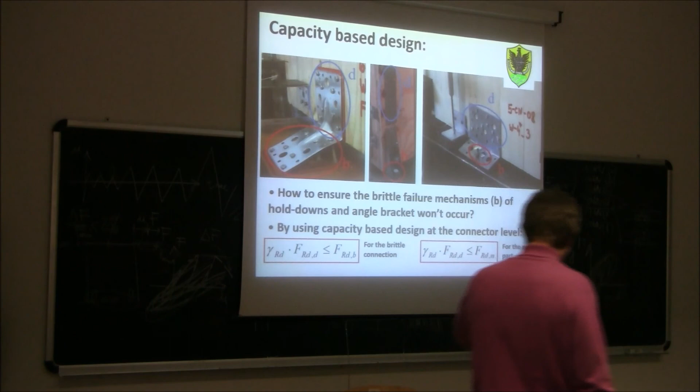So for the cross-laminated timber, we should also do capacity design not only at the building level and the wall level, but also at the connector level, to make sure those failure mechanisms won't occur. The overstrength value is 1.3 according to NTC 18.

Now, the last thing, then we finish for today, is capacity-based design at the whole building level. We should use capacity-based design at the whole building level because our building is subjected to an inverted triangular distribution of seismic forces. The seismic shear has a trend like this, more or less.

Now suppose we adopt exactly the same strength at each story. This is the strength demand. As you can see, we have a larger demand at the lower story than at the upper story, because this is the demand of seismic force. So what does it mean that we have a larger demand at the lower story? It means that at the lower story we will have to put more angle brackets, because the strength demand is maximum at the lower story.

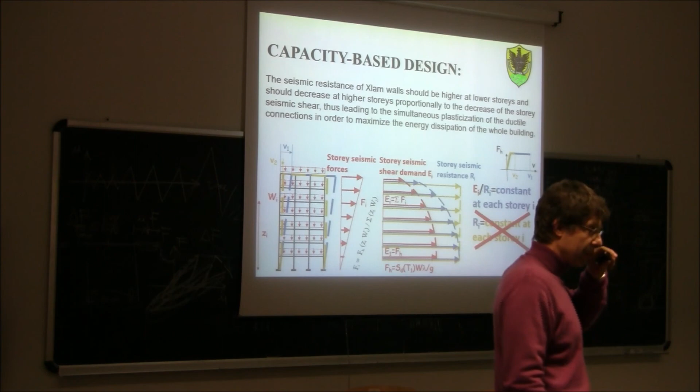Okay, because we are talking about the distribution of forces. It's like having this - the wall is like a cantilever with a distribution of forces in this way.

Now, if I ask you to do the shear force diagram, how would it look here? I start from here - one value. Then go here, the value is slightly larger because I need to add this. Then go down, I need to add this. Go down, this. And this is more or less the curve that I showed before.

So this is the distribution of the seismic forces along the height of the building, and this is the shear force diagram. It's clear? So if I do a cross section here, this is the value of the shear that I can find in my building.